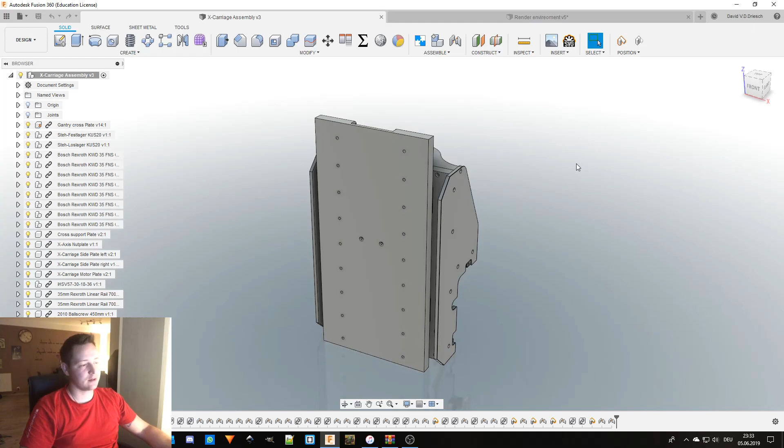This whole assembly you see here is probably maybe 4 hours of work. I actually modeled this all up yesterday, and today I just assembled it new and made some tweaks to it. Yeah, this is what it looks like. In the background it gets rendered so I can post it on Instagram with some nice pictures.

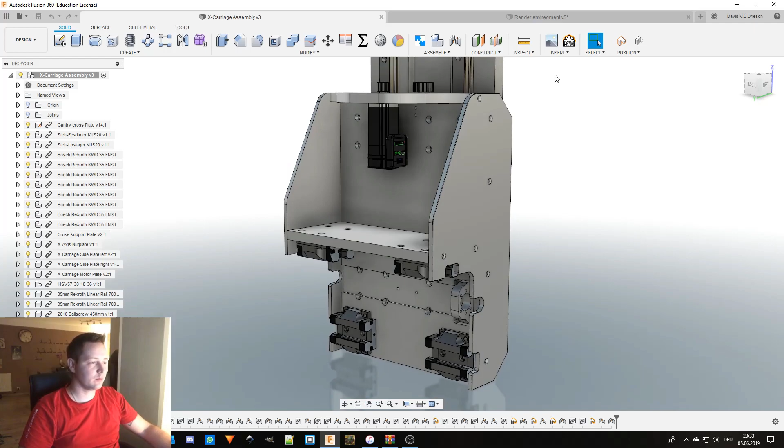Yeah, this is all 20mm, or this plate here is a 20mm aluminum plate. This one here is a 30mm, if I remember right. The Z-axis plate is also 30mm, and there's a reason for this.

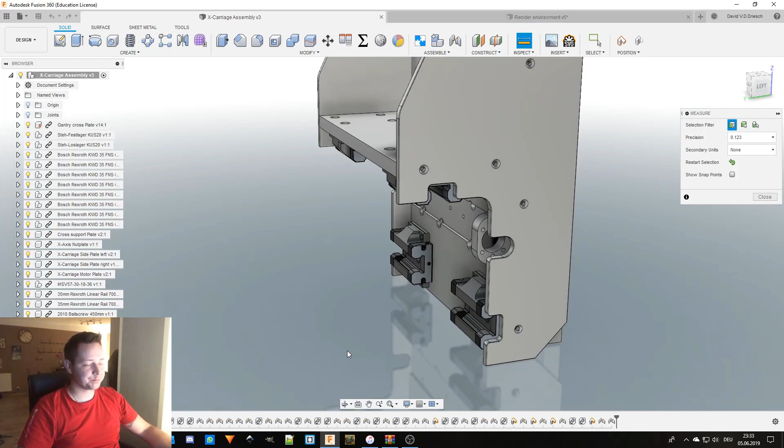I wanted it to be as heavy as possible, but also not too heavy in order for the servo motor to handle the weight, because the weight that will be on the Z plate is actually pretty high, since my spindle weighs about 5 or 6 kilograms, if I remember right. So there's a whole lot of weight that wants to drop down to the floor.

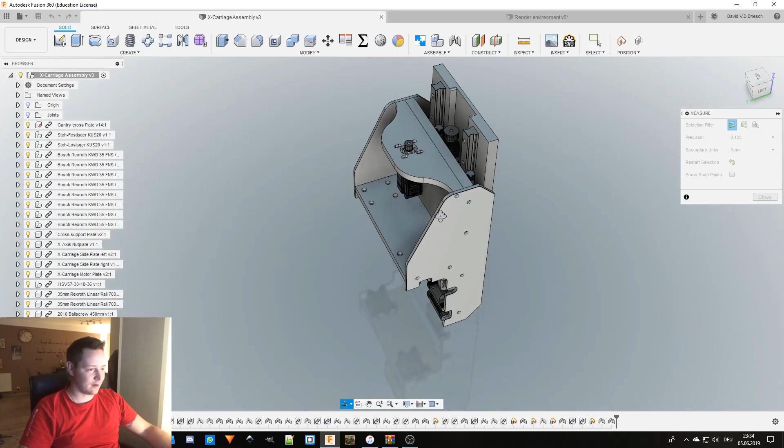Yeah, these here are just 10mm side plates in order to make this angle even stiffer. And I went for an L-shaped linear guide, so it has nice rigidity and won't tip over at the top.

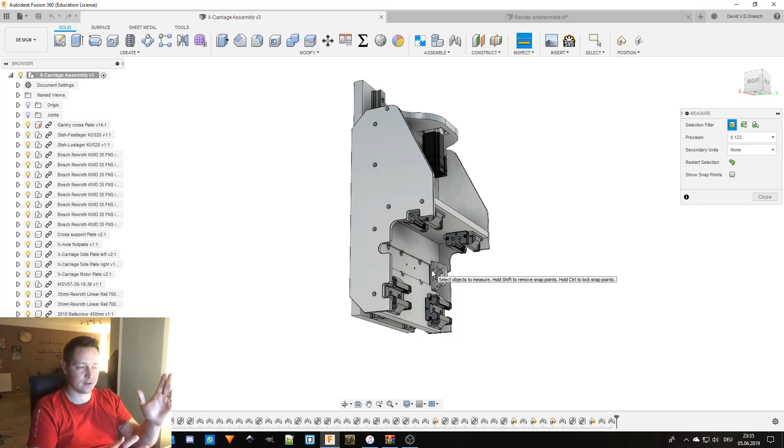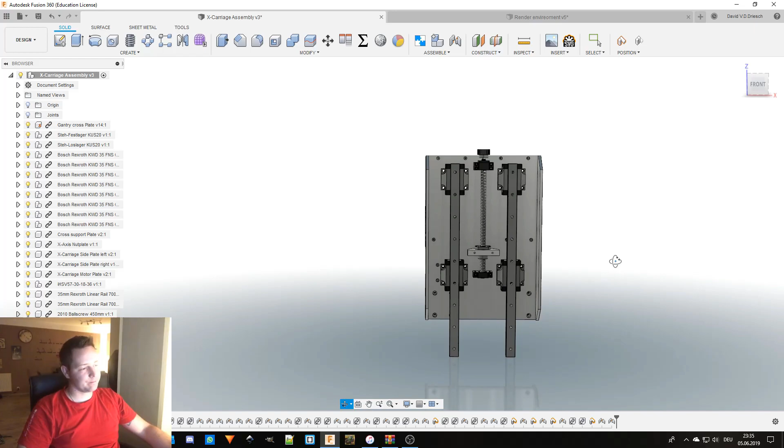If I disable the Z plate, you can see I have 700mm rails, and if I drop them to right there, which will be maximum, almost 2/3 of the rail is guided by those linear carriages, and only about 1/3 is sticking out.

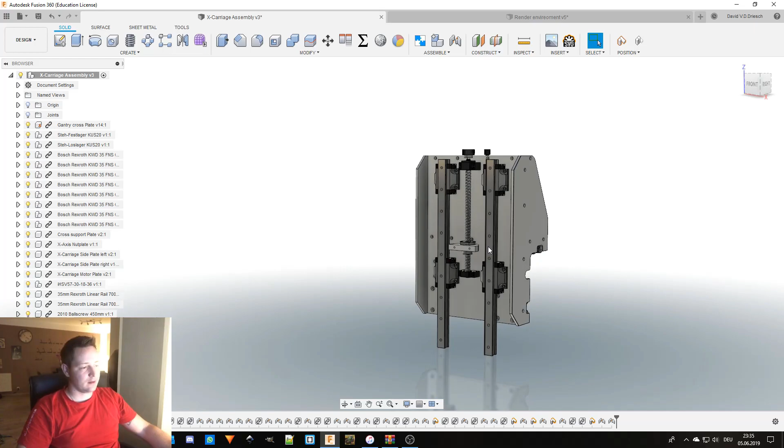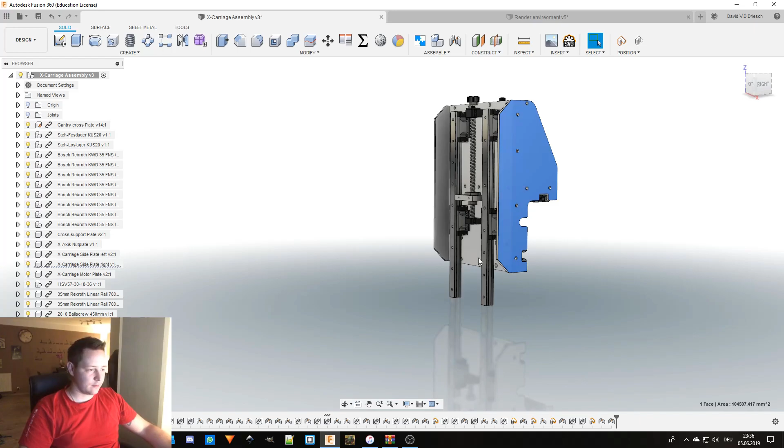This is the rule of thumb you want to go with in order to have as minimum leverage as possible, because if I extend it to the maximum at the bottom, you can see, or have to imagine, showing it from the side, this isn't a whole lot of stick out.

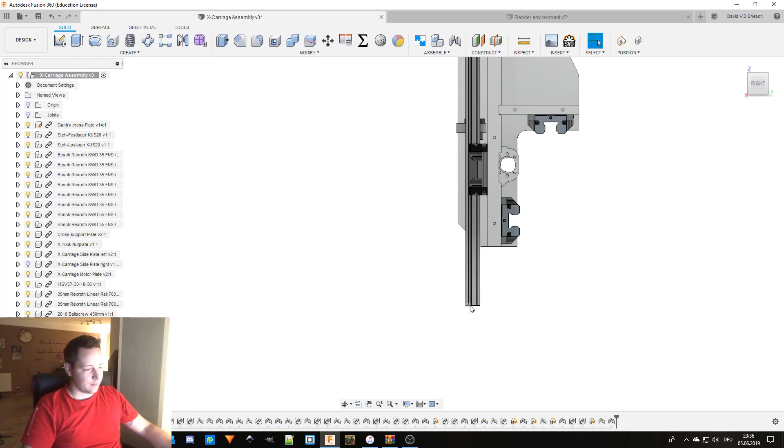Of course, somewhere here will be the end mill where the forces will be applied, but the length of stick out isn't that much, so there won't be that much flex.

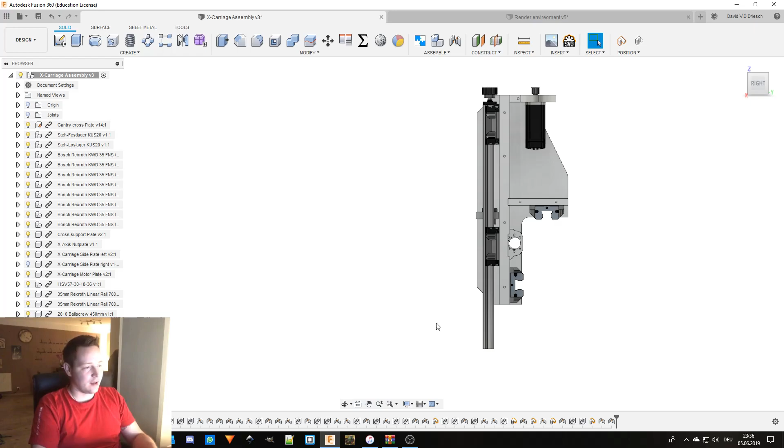Yeah, there also won't be a lot of flex because it's already a 30mm aluminum plate where the spindle will sit on, and those rails are also 35mm rails, which will also be part of the structure. So I don't think there will be a whole lot of flex.

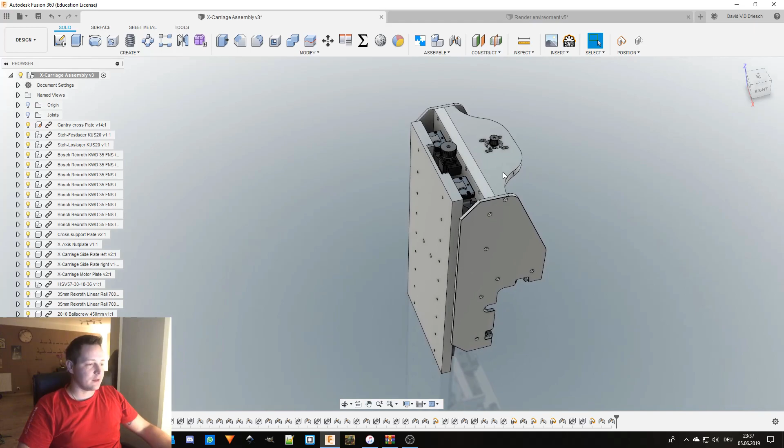So yeah, this is the design. It's belt driven, geared 2-to-1. 2 revolutions of a servo will be 1 revolution at the spindle, at the ball screw. So the servo actually will handle it, I hope so.

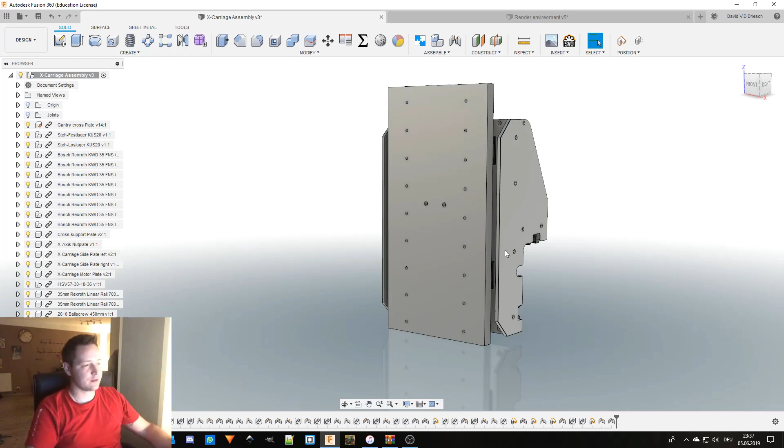Yeah, this is the X carriage. I will go quickly ahead and just assemble it to my whole assembly. Where do I have it? CNC Router assembly.

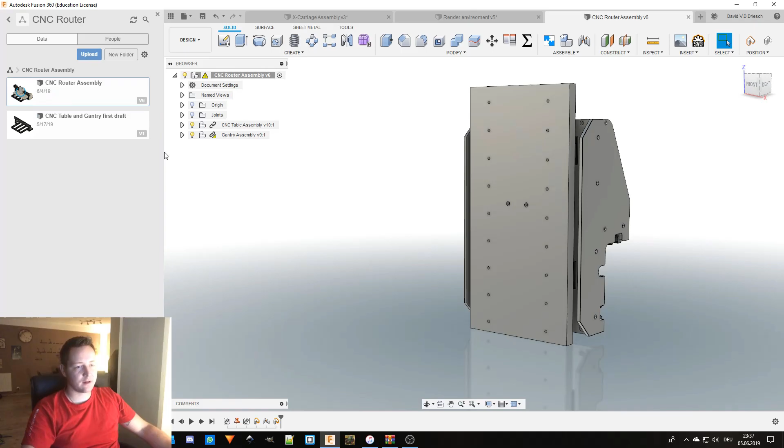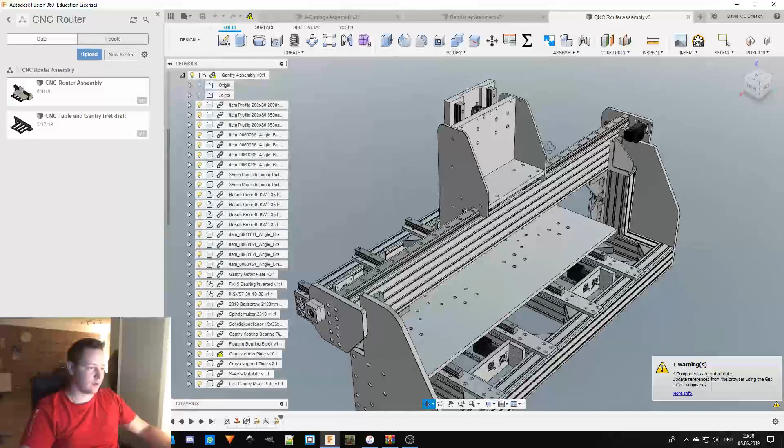This is actually yesterday's file, where I took all my measurements and just imported all those aluminum plates into the assembly, which I won't do, but I just wanted to have a look on how it looks on the gantry.

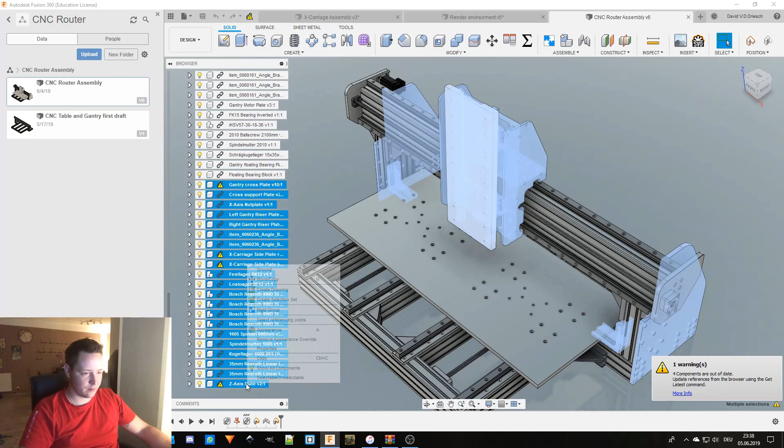But this now can be deleted. Just let me check from where I have to delete it. From there all the way to there. This one, this one. Not them. Delete, where is it? I want to delete it.

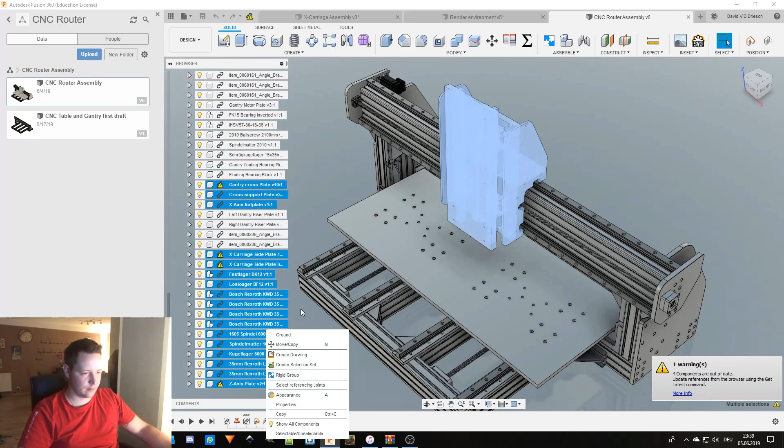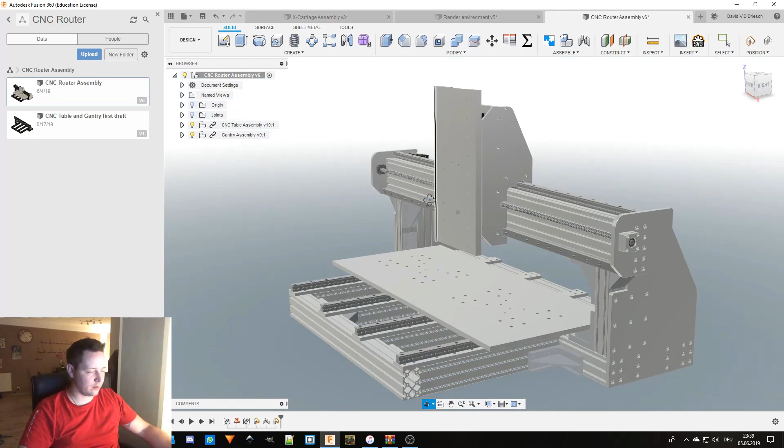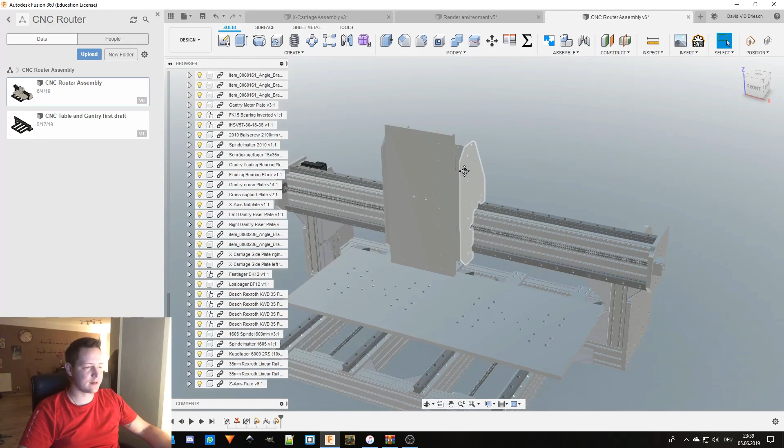Okay, maybe I first have to update it. Oh, okay, actually updated right away. It's pretty interesting because it's weird. I made a whole new folder of the X carriage, and the X carriage assembly itself is a new file. So why is it in here?

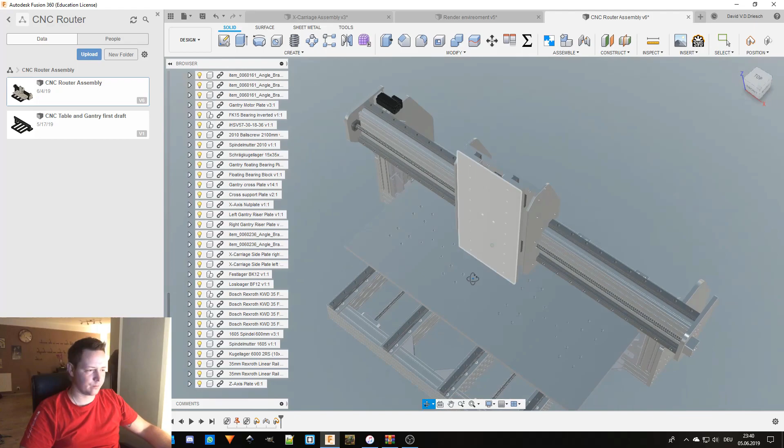It's in the gantry assembly. No, I think it's wrong. Because yeah, it's wrong. Having a bit of a struggle right now, but I will figure it out. Just a second.

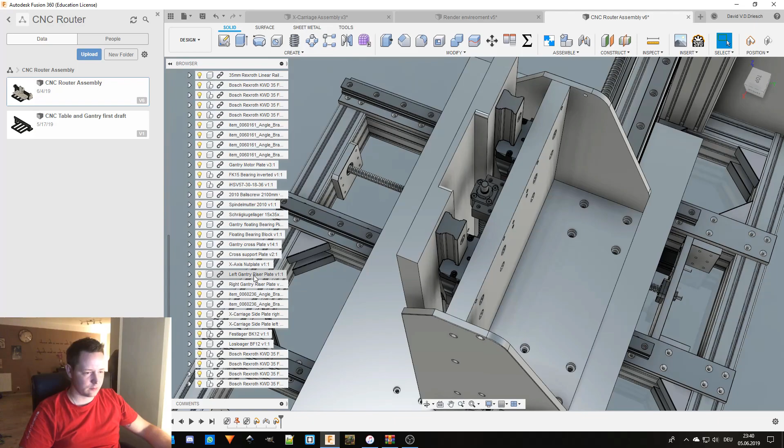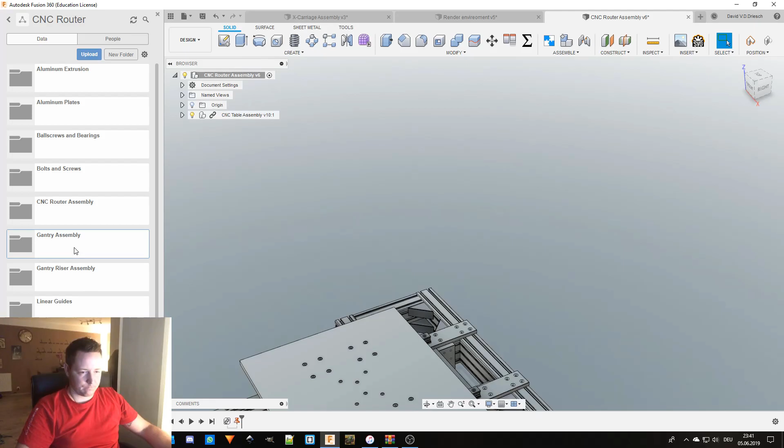This one, this one. Oh okay, wait, just delete this whole assembly. Yeah, of course, it was linked. Gantry assembly, I have to delete it from here. Yeah.

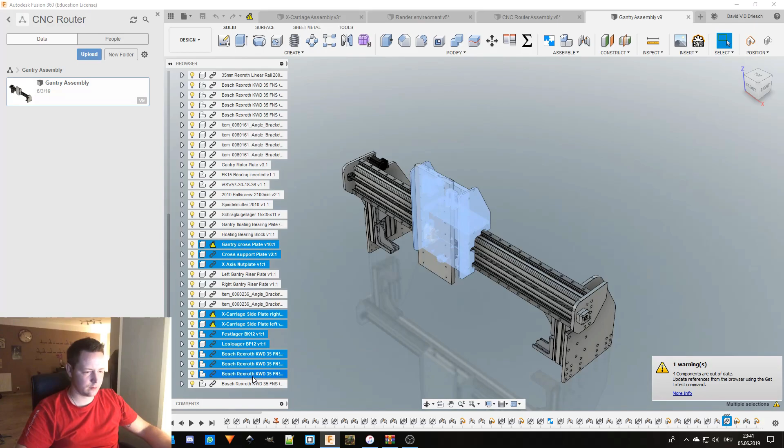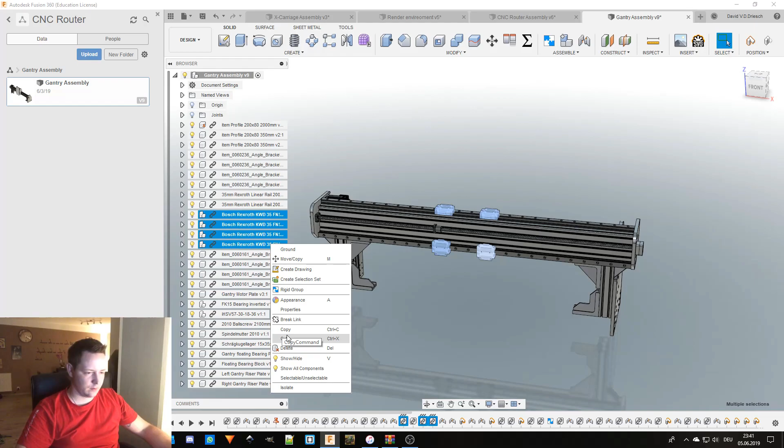It's Gantry cross Plate. This one, this one. Delete. And I can delete those ones too. This one, this one, this one, this one. Delete. Okay, so this is the pure gantry assembly. Save it.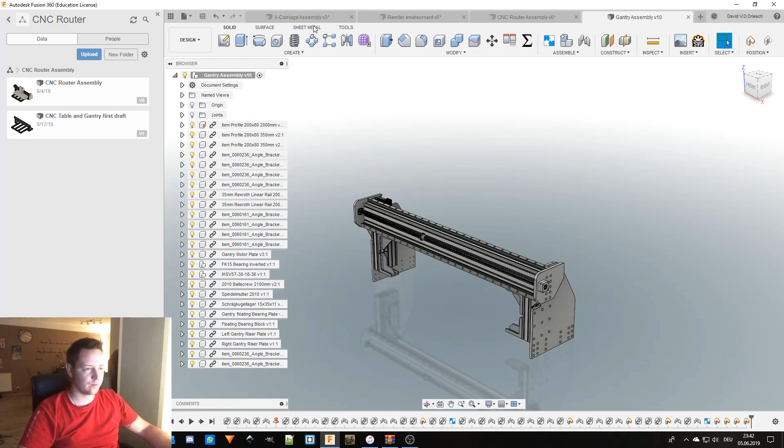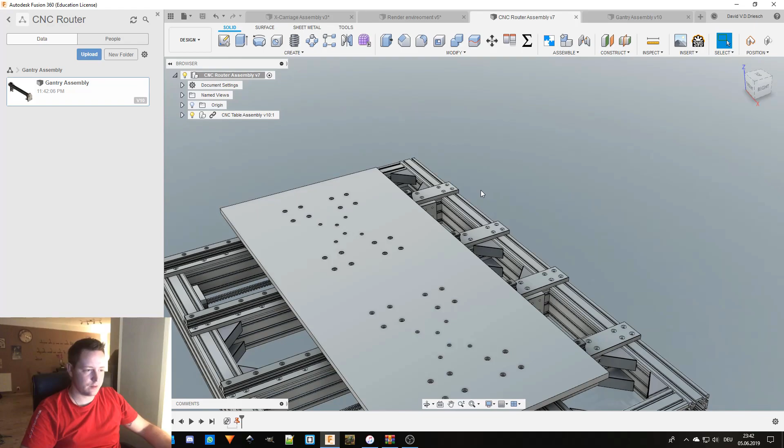Then I'm going back to my CNC router assembly. This one has to be saved. Assembly, insert. Now this one is inserted. Quickly align it. No, actually, let's make joint.

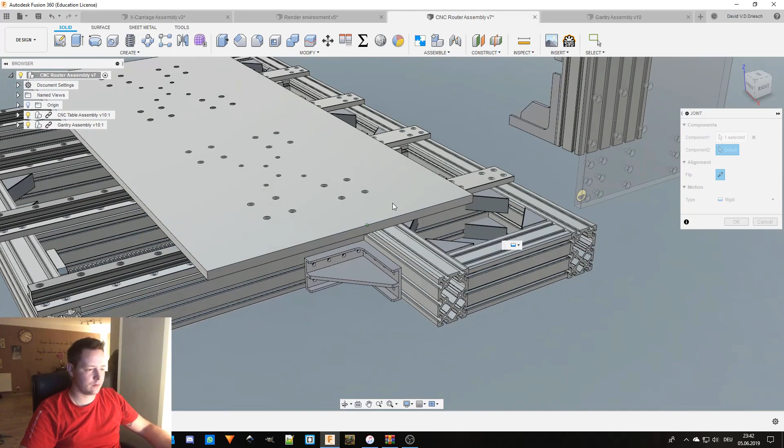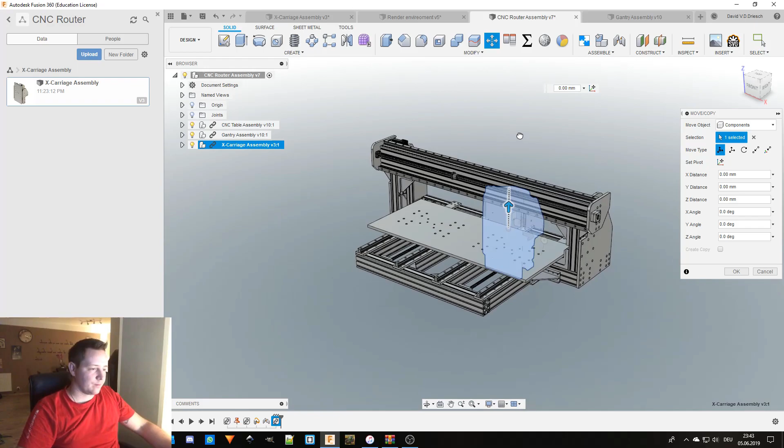This hole to this one. Okay, looks good. And now I'm going to insert my X-Carriage assembly, insert into current design. So you can see I now only have 3 sub-assemblies, which make up the whole CNC router.

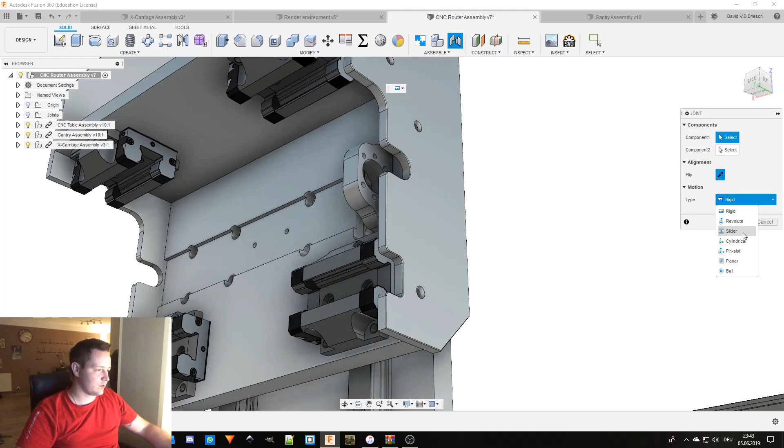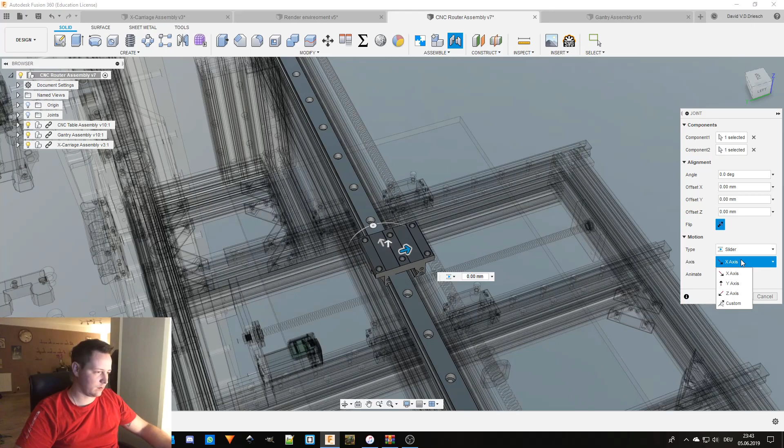Now I'm going to just make joint, sliding joint, at this point to this point. That's the wrong direction. Which one is it? Oh, that's the Y. It's the Y direction.

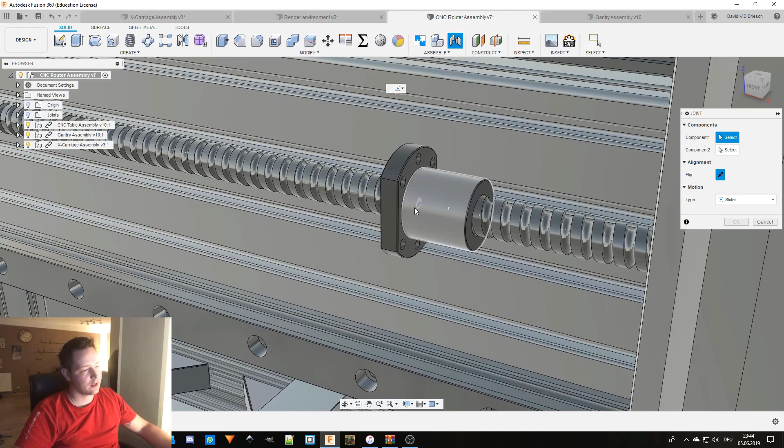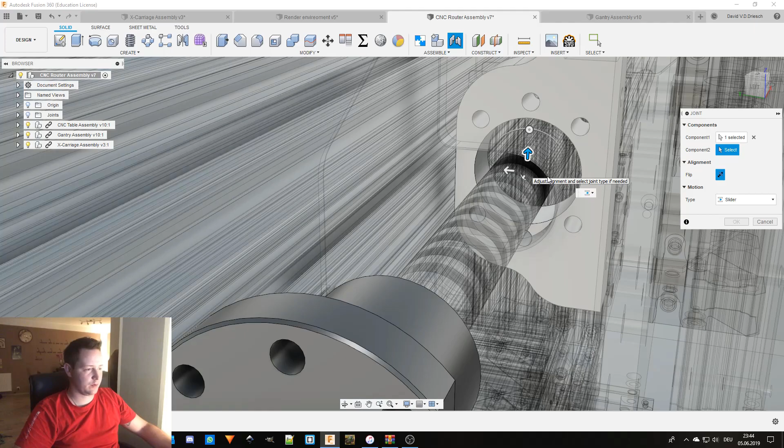Okay, now I have to assemble or join the ball screw nut. Come on, it's taking forever sometimes. At this point to this point, to be a rigid connection, and okay.

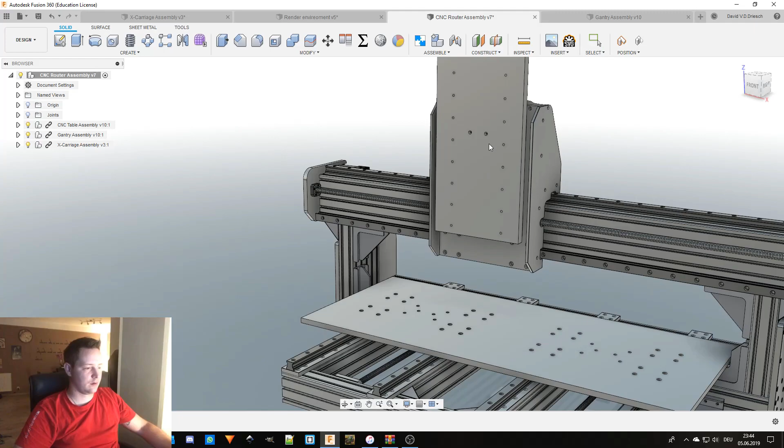So this now is my current assembly. As you can see, it moves there. I haven't made contact sets because my computer's performance isn't that great. As you already can see, it has to struggle with this one.

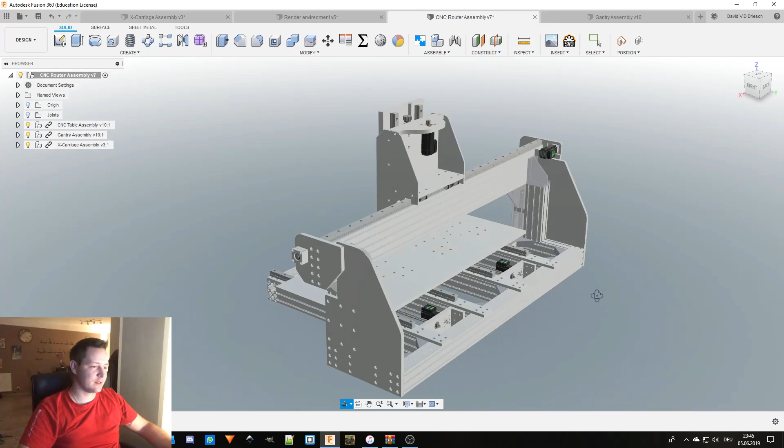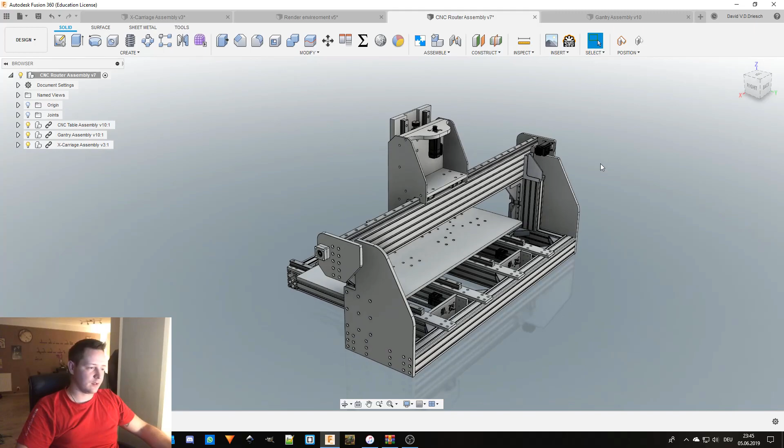But yeah, this is the current design that I have. It's coming along nicely. So in the next video I will make the Z-axis, this one right here. I have to make some bolt holes and assemble my spindle onto it, and make some little tweaks. Also I have to insert the limit switches for all 3 axes. Just have to think where I have to put them, and then this is basically it.

Maybe another 2 parts of the video series and the design is finished.